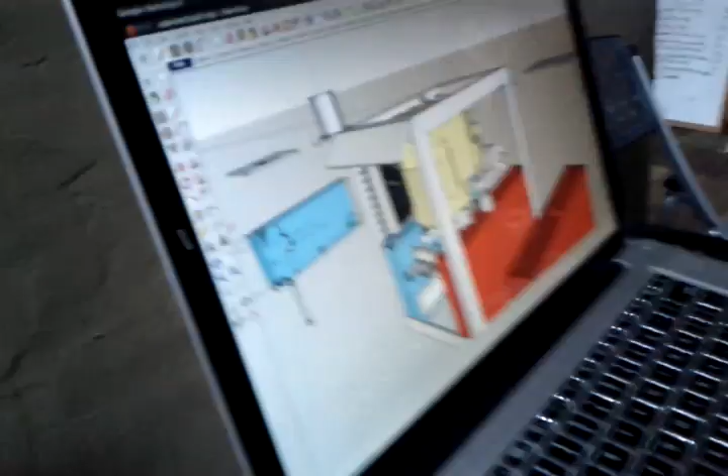So the Power Cube has evolved, and now we have a version that is using some enhancements. And what I was getting at earlier was most notably is it has a mitered frame on it, and the mitered frame gives us some additional structural support. It makes full use of the internal space, and it also is a real cube instead of a kind of a rectangular box that's not regular.

So we also use 2 tanks on it. We have a hydraulic fluid reservoir and a gasoline tank, and they're both fabricated using the same kind of materials. So this gives us the benefit that we can only have one piece of stock, and because that piece of 6x12 tubing is not a very common one in the steel suppliers, it lets us make better use of that steel that we get. In addition, it also gives us around a 7-gallon capacity for both the hydraulic fluid and for the gasoline. So that gives us additional runtime for the Power Cube, and it also gives us additional fluid capacity.

So to clarify, one of those big tanks holds the hydraulic fluid, and the other big tank holds the gasoline. Exactly. The one that I have colored in blue is hydraulic fluid. The one in red is gasoline. I made it red kind of to indicate caution. Better be careful with this stuff. Yes, sir. How many more gallons of gas does this new version have versus the old? The original Power Cube, I believe it held about 1.5 gallons, and so this one holds around 7. So that gives us several hours longer run time between refueling.

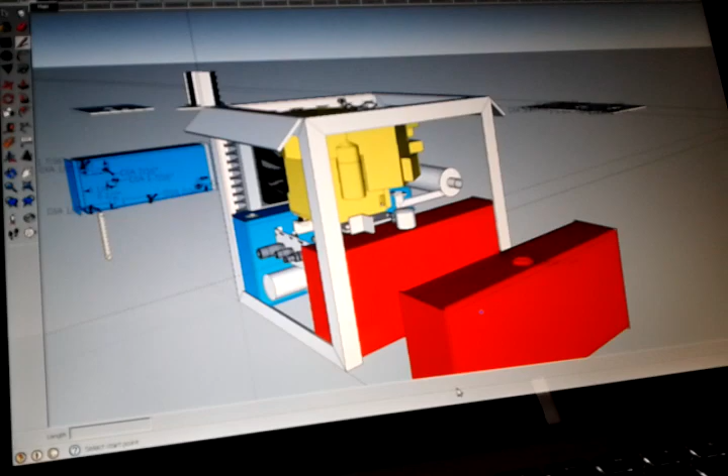Talking about couplings, transmitting or converting rotary motion from one side to another side, right? Yes. And from the engine to the hydraulic pump, right? Right, exactly. So you put gasoline into the engine, you lubricate the engine with motor oil, and then when you turn on the engine it's going to spin a little shaft, right? And then you convert the rotary motion of that spinning shaft through that coupling into another shaft at the bottom where the hydraulic pump is, right? And then when the hydraulic pump's shaft rotates, it generates the hydraulic flow, right?

Exactly. The hydraulic pump we're using is what they call a fixed displacement pump. It's about 0.98 cubic inches per revolution of the hydraulic pump. This version that we're using now is a little bit bigger pump, and it's a little heavier than the previous Prince pump that we were using before, but for whatever reason it appears to deliver more hydraulic fluid, and it seems to give more power. So that's very encouraging. I'm glad to see that.

So tomorrow we're going to be fabricating this, and we're breaking it up into several different tasks that we'll be able to do in parallel, so that we have some people working on, say, the hydraulic tanks and the fuel tank, other people working on the frame, and other people working on the assembly for the engine to pump plates where they're going to mount. And that's what we're going to go into in some detail in just a few minutes.

Any other questions about the Power Cube, the new version of it? How many horsepower was the previous engine? I think the original one was around... Versions 1 and 2 were 18 horse, and then we went up to 27. I've seen some that were 25 with some of those old Kohler engines, and the latest one I've been getting is a 28 horsepower engine. It's a common form factor, that Briggs & Stratton type of engine, and we could even ramp it up. I think they have 31, 32 horsepower engines you can get. It would be a drop-in replacement. Same size, about? Mm-hmm. It's that same two-cylinder Vanguard Professional Series.

He's getting there. Another benefit we've got on this Power Cube is we centralize all the controls on a control panel. We've got the hydraulic inputs and outputs, the throttle, and the key switch all clustered on a control panel. In my view, it makes its operation simpler to understand. We have many advancements for future versions, many ideas about things we can use to enhance it, but that'll be coming out in time.

Today, before we do the production run tomorrow, I'm going to be working like a fiend trying to get the other changes we just discussed to make it more modular. So the tanks, the fuel tank and the hydraulic tank, can be detached from an existing Power Cube. And the engine will be on a quick attach plate so we can more readily yank the engine.

Part of the idea is that we'd like the Power Cube to do more than just pump hydraulic fluid. We'd like to be able to couple up an electric generator, air blower, water pump, or any other type of compressor, and any other type of machine that can use mechanical energy. We've even discussed at some length a direct mechanical transfer for an application like a car or a utility vehicle.

That's one of the things I'm interested in working on, by the way, a utility vehicle. Mm-hmm. Let's see. I think we've covered most everything in here.

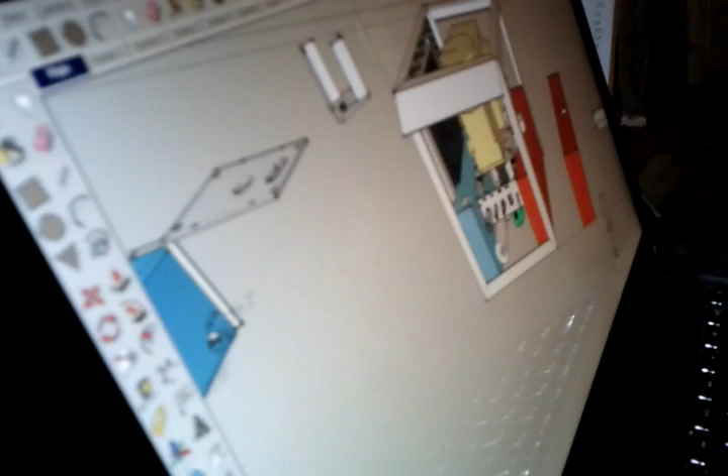It has a... What's that white cylinder? You go back to the front view. The front view, we have a cylinder over here. Yeah. And this is an oil filter. And it's very important because in the normal operation of a hydraulic system, you have components begin to wear and you get metal shavings and other particulate contamination in the oil, so we need a filter to filter it out. Okay.

I'd like to talk a little bit about the procedure tomorrow. We'll go to slideshow. So the big point about the extra modularity is that things like the engine or the pumps have been failing. If you can disconnect them within a period of 5 minutes, that's basically our design goal, then you can talk about having a power cube that breaks be ready in operation in minutes after that. Because we have a number of power cubes, and we can switch parts between them. So that's quite useful.

It also would help a lot for repair. Say if for whatever reason we have a component failure, it'd be good to be able to change out an engine or hydraulic pump or a shaft coupling. And that's proven to be time-consuming and problematic in the past, so it would help to have that modularity to be able to quickly pull it apart and fix things and put it back together. Eliminate downtime, that's always good.

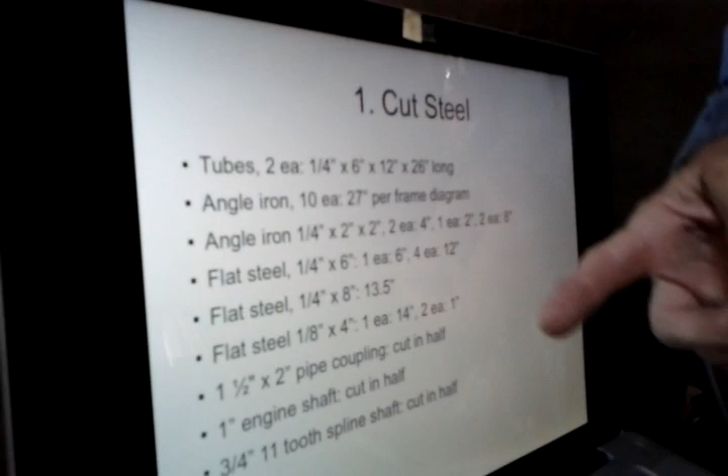So we have several different tasks, and I've basically outlined the different steps of the procedure for building a power cube here. The first step is going to be to cut steel. I've outlined the different steel members here that we're going to be cutting, and this is going to change a little bit based on the new frame discussions that we've had. So that's the first thing.

Secondly, we're going to fabricate the tanks. Now this is going to be the two tanks. We have the hydraulic reservoir and also the fuel tank. And these are going to be using the 6-inch by 12-inch rectangular tubing. So we'll cut it off at 26 inches, weld a plate on either end, and weld accessory flanges or filler necks or different components on it as necessary. We also need to weld onto it the mounting hardware for mounting the engine plate, because the engine will be suspended between the two tanks.

Next, we also have the shaft coupling. This is something that is going to have to be fabricated just for this application. We have two pieces of the shaft: the engine takes a 1-inch keyed shaft, and the hydraulic pump takes a 3/4 inch 11-tooth spline shaft, so we have large shaft couplings for those. We're going to cut each of those in half and then connect the two by a double roller chain coupling. I don't have the drawings for it right here. We'll be getting more information about that before tomorrow, but that's going to be a separate activity.

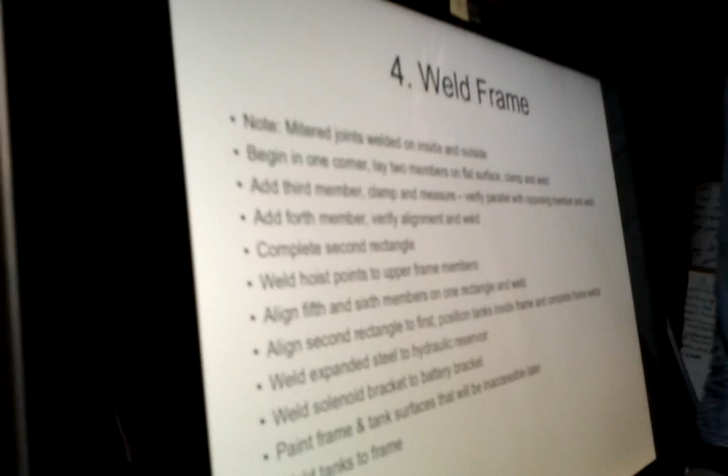Now, many of these tasks can all be done in parallel. Cutting the steel is one thing. The shaft coupling is another. Fabricating the tanks is another thing also. So they can be done in parallel, so we can boost our production time. We're going to then weld the frame. The frame is going to be welded as one unit before attaching anything to it. So this is going to be a separate module by itself, the frame.

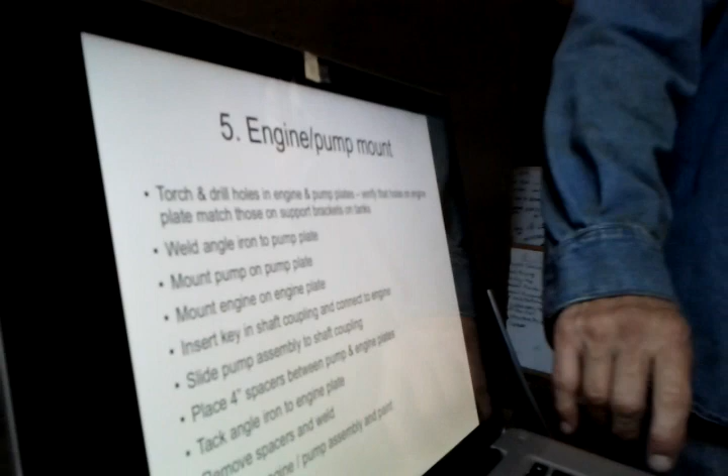Then the engine and pump mount. This is an assembly where we have a plate that bolts to the engine, then a space where the coupling goes in between the engine and the pump, and then another plate where the pump mounts from the bottom. The plate is also going to have quick attach features, so we can have vibration isolation from the tanks, so it doesn't transmit the vibration to the tanks, and quick attach bolts, so we can quickly unscrew those two bolts and pull the entire pump engine assembly.

So just to clarify, one plate for the engine and the engine mounts from the top, and then one plate for the pump and the pump mounts from the bottom, right? That's it. But these have to be all one integral assembly, with the supporting members between there.

Basically, the engine plate has to support the pump plate and the pump assembly, because that's all going to dangle from below. And so the plates also need to be very parallel with each other, because if they're a little bit skewed, then the two shafts will be off center, and you get additional friction, and it'll destroy the coupling a lot faster.

Tom, don't we want to have a third plate, which means that you can take the pump or engine off independently? That's true. I've heard that in the designs, and I'm still wrapping my mind around that one. So that's coming along. Okay. Yeah, because think about it. If you had a plate that stays there all the time, and on top of that is the engine plus its assembly, and on the bottom is the pump and its assembly, you can take either off independently as you need to without having to take both at the same time. But we'll see if we can fit it into this production run.

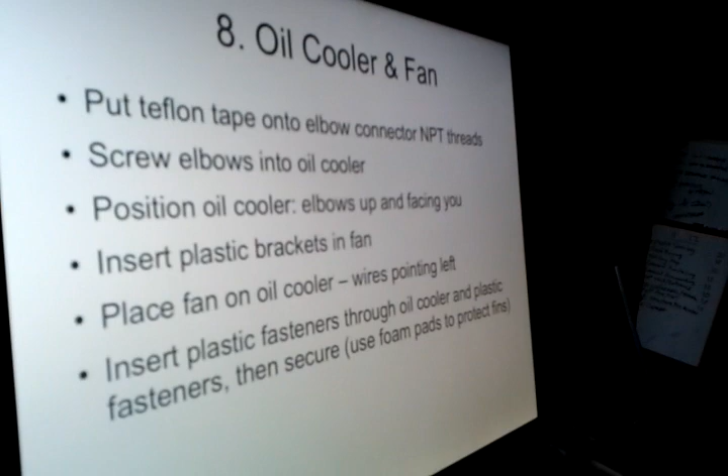The oil cooler and the fan. We basically have an oil cooler. It's like a radiator, and we're going to put the fan on it and attach it. It came with some mounting hardware, and we're going to use that to mount to the fan. But we use some vibration isolation in there to keep the mounting from damaging the fins on the oil cooler.

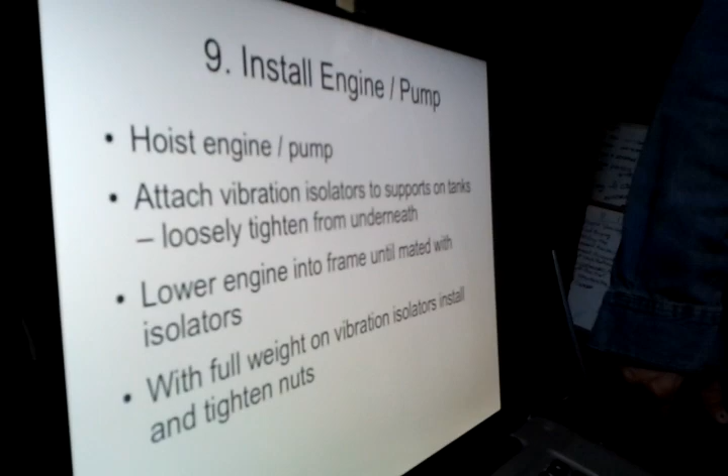And then we come to the big step, where we actually take the engine and the pump and install that into the frame assembly. After that, we install the oil cooler and the fan on the side of the frame assembly. On one side of the frame there's some expanded steel, which should have been done in a previous step in fabricating the frame. The oil cooler will bolt to the expanded steel, and it has some rubber mounts that mount rather easy.

Then we install the control panel, and there are several different pieces to that. We position it there, and then we connect the hydraulic lines. At this point, we can tighten the hydraulic lines on both sides, both to the oil cooler and to the control panel. These are JIC fittings, so we want them good and tight, but we need to be careful we don't over tighten. As I understand, there are some problems with over tightening the JIC connectors.

Then the wire harness and the battery. We're going to drop the battery in its slot, and then connect the wire harness to the fan, the solenoid, and the other components up here. I don't have details on these screens, but for the hydraulics, we're going to connect the suction plumbing and the supply plumbing, and then fill it with fluids. That includes engine oil, hydraulic oil, and the gasoline. And then the next thing is we start testing.